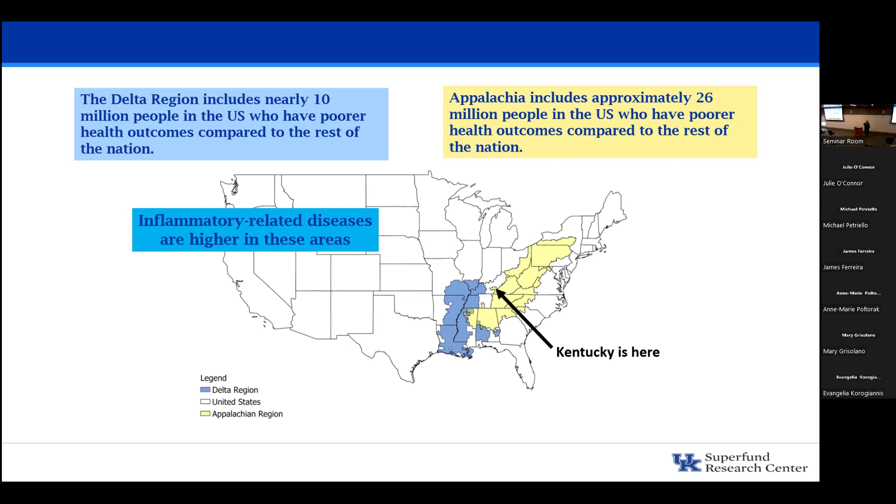Like many Superfund research centers, we follow the framework we are assigned. We have biomedical research projects and environmental science and engineering projects. Our biomedical projects focus on disease risk prevention, and we focus on healthy lifestyles—how nutritional interventions can reduce the toxicity or toxic effects of pollutants. That's project 1. For project 2, we look at how physical activity can reduce harmful effects associated with toxicant exposures during pregnancy.

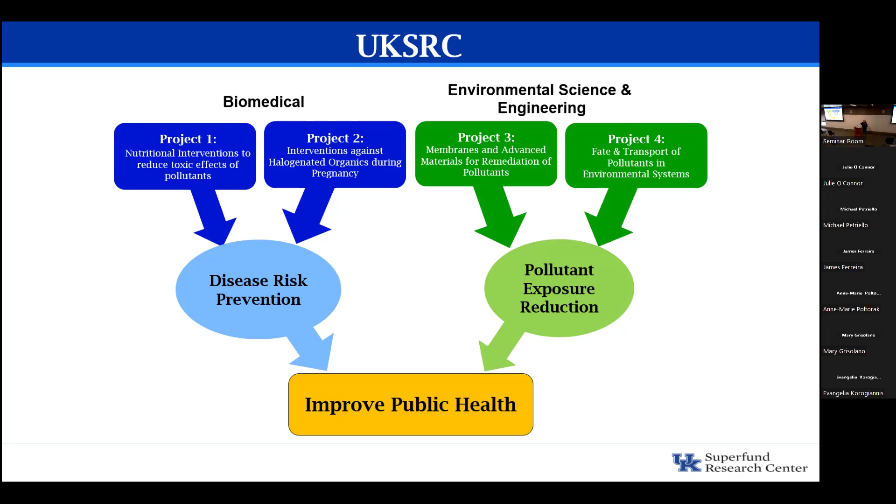We work with our communities in Kentucky, and that cultural context—interacting with communities, having long-term lasting relationships—is critically important for every Superfund research program, and ours is no different. Our program has been funded since 1997, so we have long-lasting relationships with our communities and know their needs. We're constantly assessing them and strive to empower them to make the best decisions with the science we know, answering their questions. We want them to make decisions about protecting themselves from pollutants in air and water, and improving their health, including diet and physical activity. That's really the goal of our center.

I want to tell you about two recent outcomes that are really impactful and capture what we care about a lot in our center. As director, these are outcomes that really describe what matters to me. The first one was discussed in Environmental Factor, an NIEHS newsletter, in April of 2023.

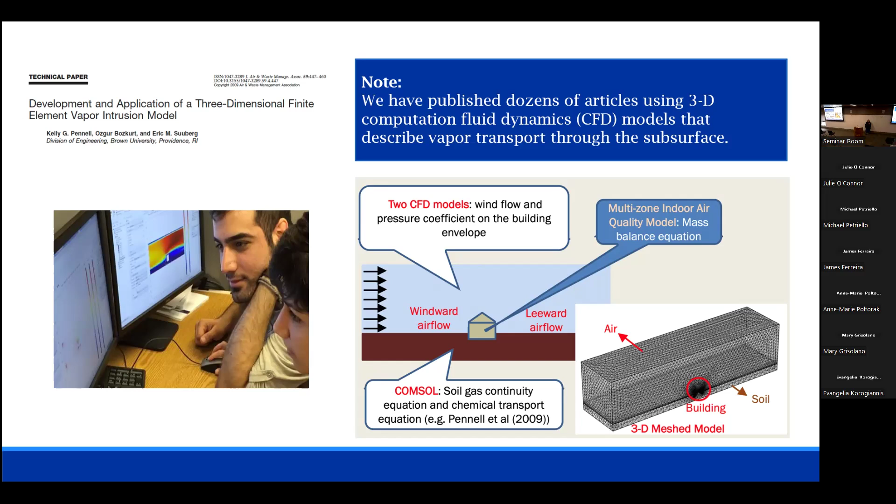As an inspiring person that I am, I convinced other Superfund research programs to go with me. Thank goodness. So we went into a community, the Metro Boston area, and we had three Superfund research centers going. We had people from College of Public Health at Boston, and I had a longtime colleague and mentor of mine, Eric Suuberg at Brown University.

We went in and we were going to start drilling holes through, and we did basements, backyards, collecting indoor air.

We did all of that. We took geoprobes into people's driveways. You can see that these houses are very close to each other. A driveway is all that separates them.

We recruited homeowners to allow access for sampling, so they had to opt in. This was Madeline Scammell from Boston University School of Public Health who was part of the recruitment of these property owners, homeowners. We partnered with state regulatory agencies. We interacted with responsible parties.

When we were doing this, it was based on a classic, and now I know outdated, vapor intrusion conceptual model. It was included in the EPA draft guidance of 2002. We were out there in 2009, 2010, 2011. It was a multi-year study.

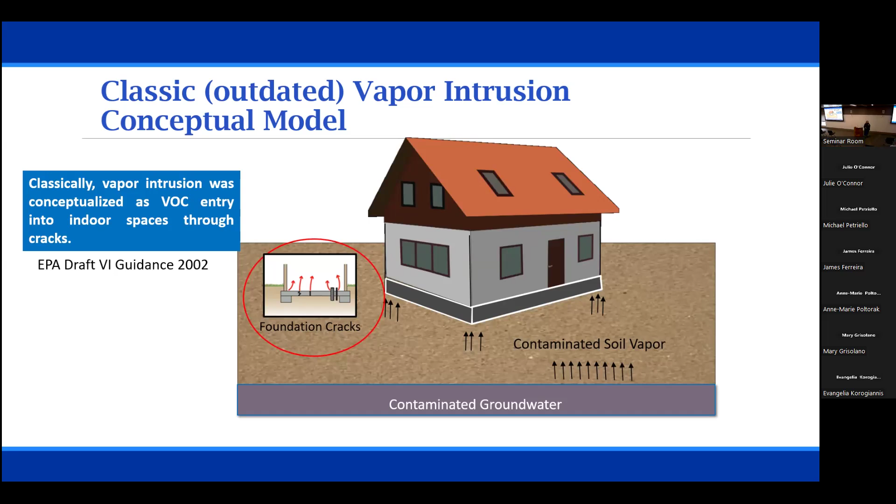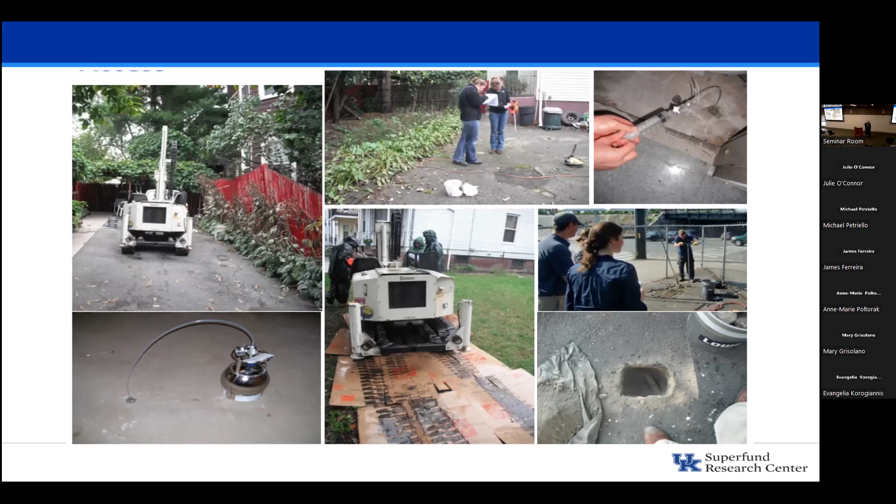And we made a discovery. We learned that during our indoor sampling, we were getting higher concentrations on a second floor indoor air than we were in the basement. This made no sense.

At first, I was like, let's just collect another sample. This makes no sense, and it absolutely is messing up my validation of my computational fluid dynamics model. And my lovely colleagues who are in public health said, Kelly, but this is a public health risk. And I said, it may be, let's collect another sample.

And we continued to talk about it. The reason being is that that basement had already been mitigated.

So in vapor intrusion, the way you mitigate is that you depressurize the basement, you usually have a vacuum extraction well, and the entire basement had been sealed. So they had epoxy on all the walls. So my engineering mind said, this is not a vapor intrusion problem.

Let's sample again. And again, my great public health colleagues, who are now near and dear friends of mine, said, Kelly, but it is a public health risk. I said, but my model. I said, Kelly. So we did this. And it really wasn't that much of a back and forth, but all of us were kind of like, this is very odd data.

And why is there this sewer gas smell? And why do we have slightly higher concentrations where there is sewer gas smell? In hindsight, this makes a lot of sense, but when you're in someone's home and you're trying to make sense of data, and it's taking two weeks to get your data, it's very hard to put it all together.

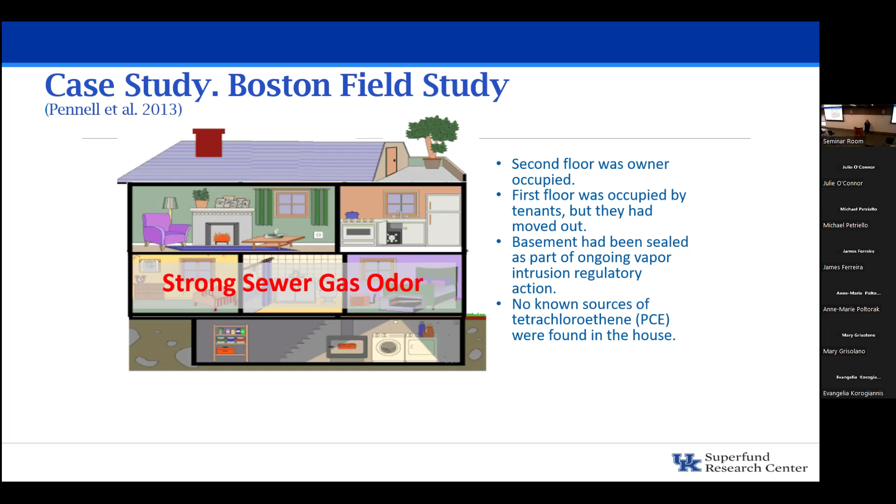It turned out, after a lot of back and forth and a lot of thinking—and I don't like the term overthinking, because I think I usually think just the perfect amount—we discovered this was coming from a faulty toilet connection. All toilets have a wax seal on them. If you've ever sat on a toilet that's slightly jiggled, it might be the wax seal. If you've ever smelled sewer gas, it means sewer gas is getting into your building.

What we discovered is that this sewer gas actually was a main source of PCE in the building, and that the mitigation system that was installed and approved by the regulatory agency was actually not mitigating the vapor intrusion risk. The vapors were coming through a faulty toilet connection. When we repaired the toilet connection and sealed it, there was no more PCE in the building.

This had been completely overlooked because the standard procedure for sampling is only to sample on the lowest floor. The same rationale that my engineering mind was using: why would it be higher up above? We should sample on the lowest floor. Vapors come in from the basement. It was that conceptual model.

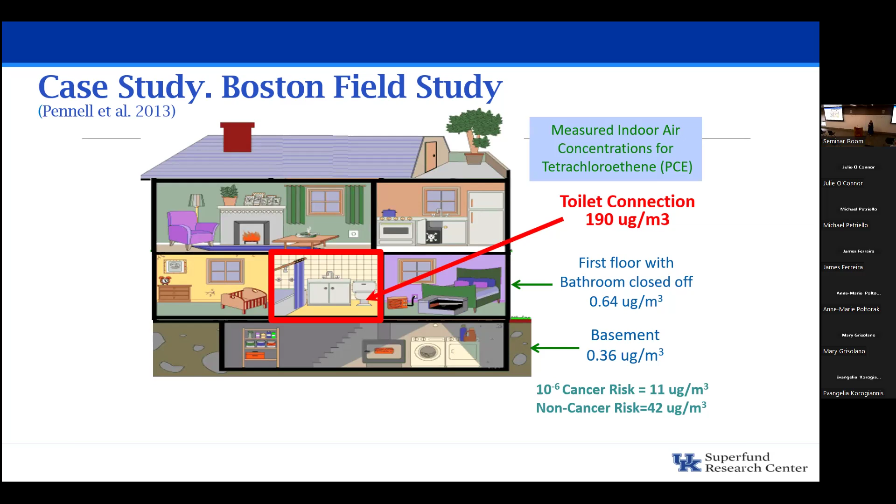Our findings were published. It created a lot of people doubting us, and then people coming forward, and then back and forth. It was a bit of a real disruption. Then it made it into the finalized EPA vapor intrusion guidance.

So you can see, as I underlined here, they actually say vapors can also enter structures not intended for human occupancy through sewers, drains, whatever. And so suddenly this went into the guidance in multiple places. If you now search the 2015 finalized vapor intrusion guidance, it mentions sewers in multiple places and lists our finding from that study that was originally only supposed to be validating my model. Our significant accidental finding was that sewers are a significant entryway for vapor intrusion.

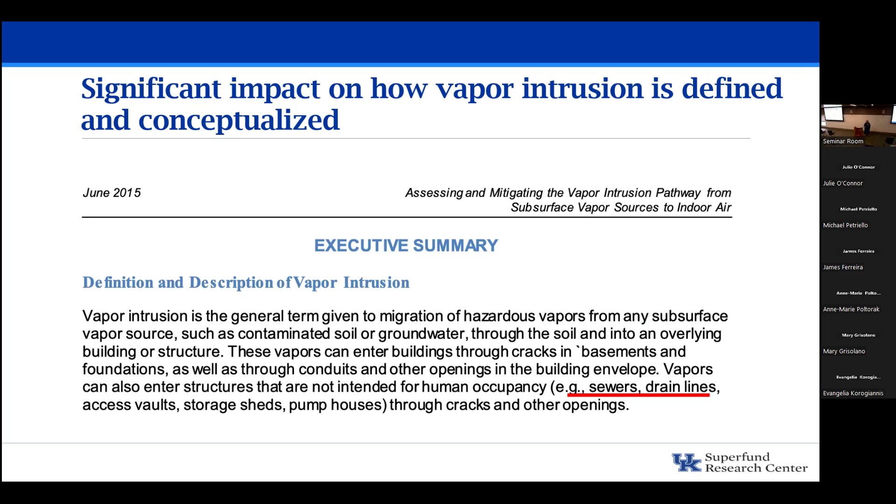And so thank goodness we questioned ourselves. The issue, why I said it caused a disruption, is that suddenly, who's responsible for that? Is it the city? Is it a municipality? Is it the responsible party? Is it a homeowner? Because remember, it was a faulty toilet seal.

Who's responsible for that? Should the city—were they allowing discharges? Oh, but their sewers were really dilapidated. Should they have been maintaining that? Suddenly, it's just a blame game. And that was very difficult.

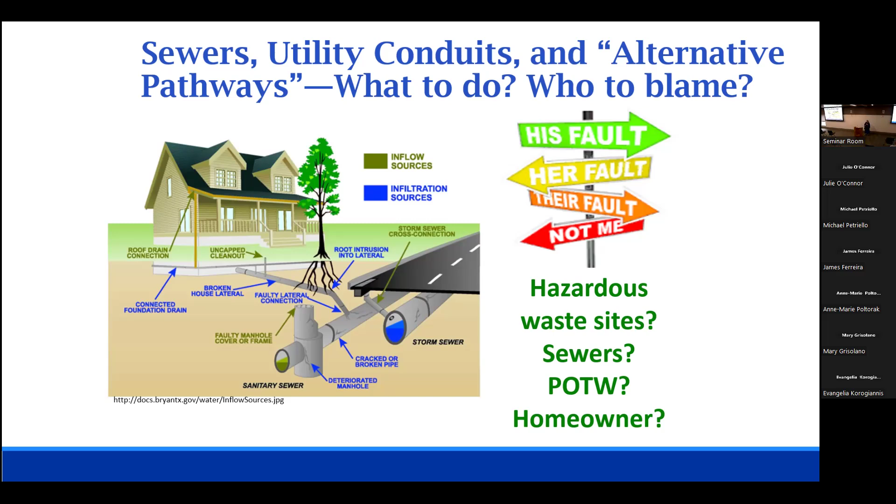Sewers, if you don't know, are a major infrastructure challenge. They leak. They leak a lot. And so if you are not expecting them to allow contaminated water to get into them, you have a faulty conceptual model. There are over 1 million miles of sewers in our country, and we largely do not think about them. Many of our sewers are broken or leaking.

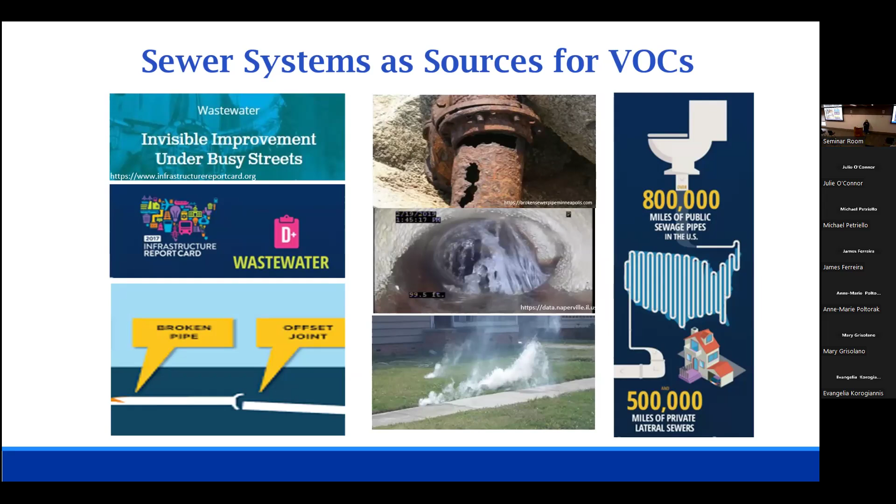This is just a hypothetical. I'm not saying this is true at this site, but what I want you to consider: here is a 5-mile TCE plume. It happens to be in Michigan. When we think about TCE plumes, we are very quick to think about groundwater contamination and putting people on alternative drinking water. Over that 5 miles, we need to think about what is atop that 5 miles.

So a 5-mile groundwater plume is below ground. But on top of that are entire cities.

Infrastructure, so much else—entire communities. Have we thought about all of that? We think about the public wells; those are quick for us to reduce risks to. But what are the other potential exposure risks we should be considering, and have we considered them? Alternative pathways that promote vapor entry into indoor spaces have not been adequately conceptualized or mitigated, typically.

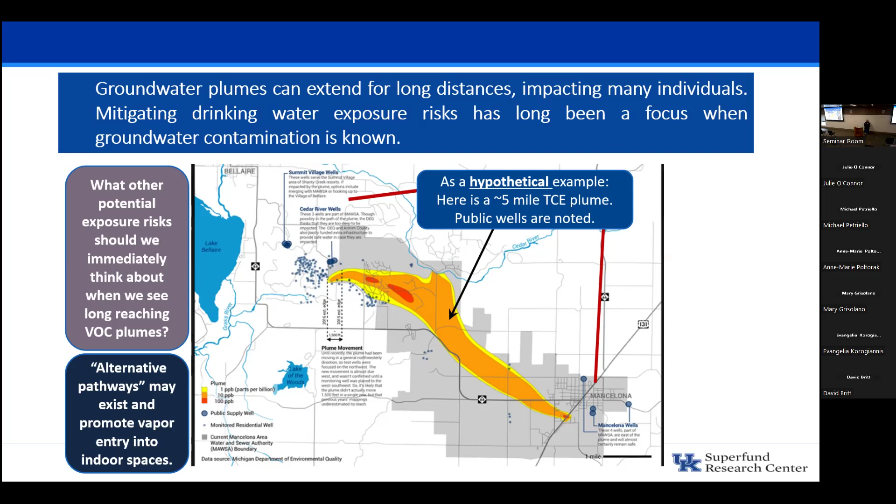Here's a study we did in Mountain View, California, where we continue to work quite regularly. What I'm showing in pink is the vapor intrusion study area as originally defined, associated with a TCE plume from a Superfund site. The blue area is an expanded vapor intrusion site due to sewer system vapor intrusion.

If you look at the scale, you can see it's a quite large area that was expanded. All of that includes buildings, homes, dwellings. When you only consider the classic conceptual model, you completely miss that.

If you look at the yellow circles, those were hotspots from where wastes were previously dumped. There was slumping in the sewer line, there were cracks, and there are hotspots in the environment there. We did a lot of work to conceptualize that and published it—the bottom pictures show my group and collaborators doing field studies there.

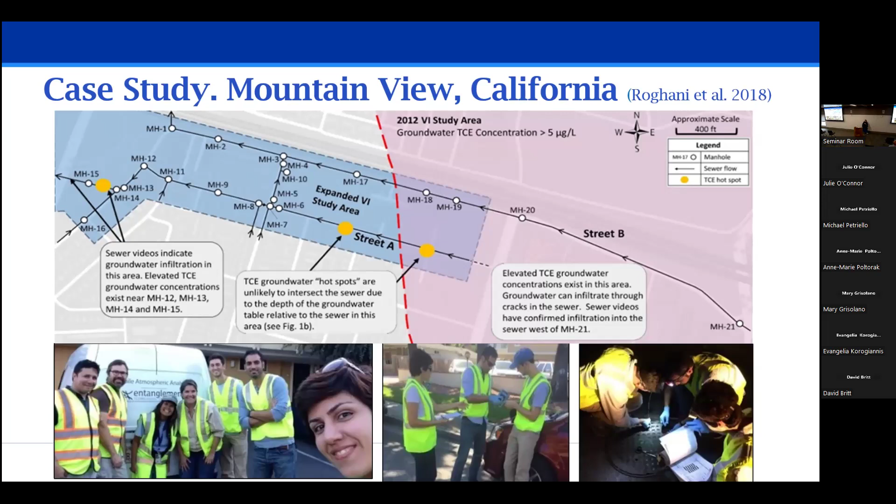While we were there, we collected many samples from about 40 different manholes and cleanouts in the sewer system. We did TO-15 sampling, collecting air and vapor samples in Summa canisters. We also did passive sampling, collected sewer water samples, and looked at videos of the sewer.

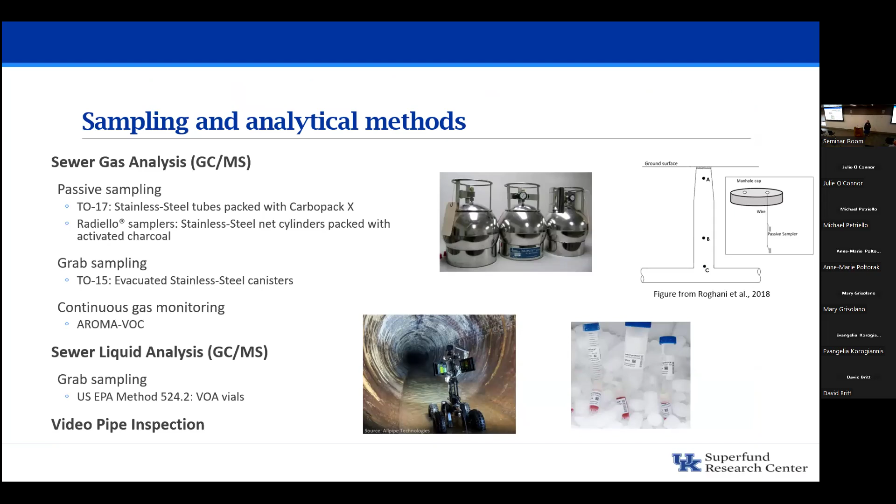What I want you to think about is a manhole versus a cleanout. A manhole is typically in the street or in the right of way. A cleanout is typically near a home or right up against a home. What connects those two—the sewer main and that cleanout—is called a lateral, typically.

If we're detecting TCE vapors in a cleanout, that really means they're very close to getting into a home. So the question is, how do we keep those TCE vapors from entering a home? You might think we have plumbing traps—we've all seen things underneath our sink—so they don't get into my home. But there's very little stopping those vapors and sewer gas from getting into your home.

I want to also discuss why we have so much variability in sewer gas concentrations. I'll show you in a minute that we do have a lot of variability. I'm not showing a lot of data today, but if you want to see it, I can send you publications.

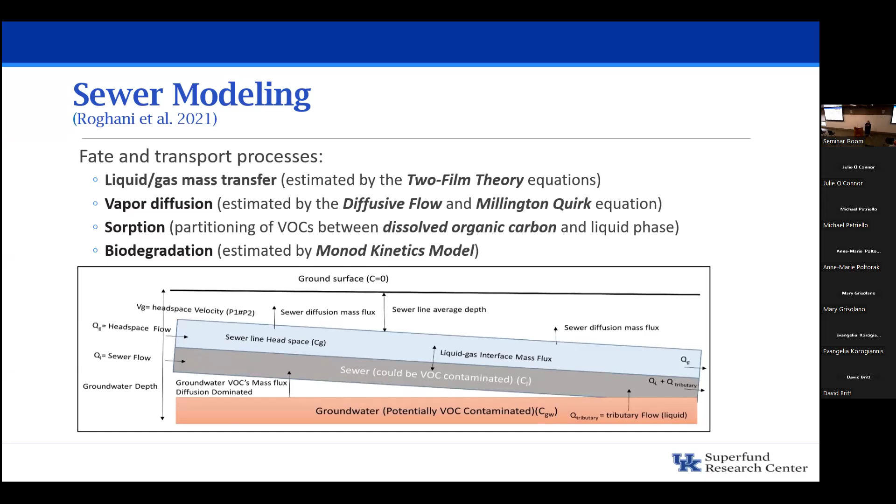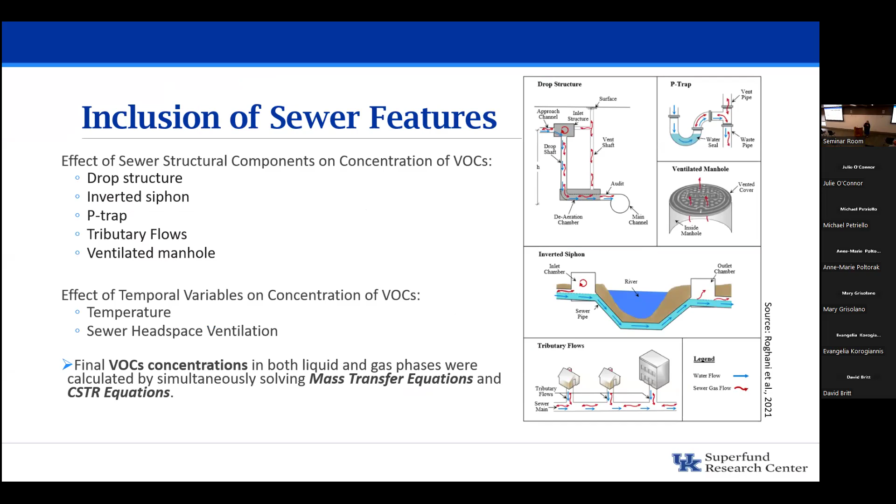We also included different sewer features to account for—so if you have a lateral coming in and someone is discharging clean water, that actually changes your sewer concentration. We've tried to account for many different features here, and again we're seeing some agreement. We published this in 2021.

Still, this recurring thought is: if you know that the source of the contaminant is in the sewer main, what can you do to prevent it from getting into homes? This has been a really big sticking point for how you mitigate this problem. The typical vapor intrusion mitigation is that you put a system beneath someone's basement, but this is not a basement problem. So how are we going to mitigate this?

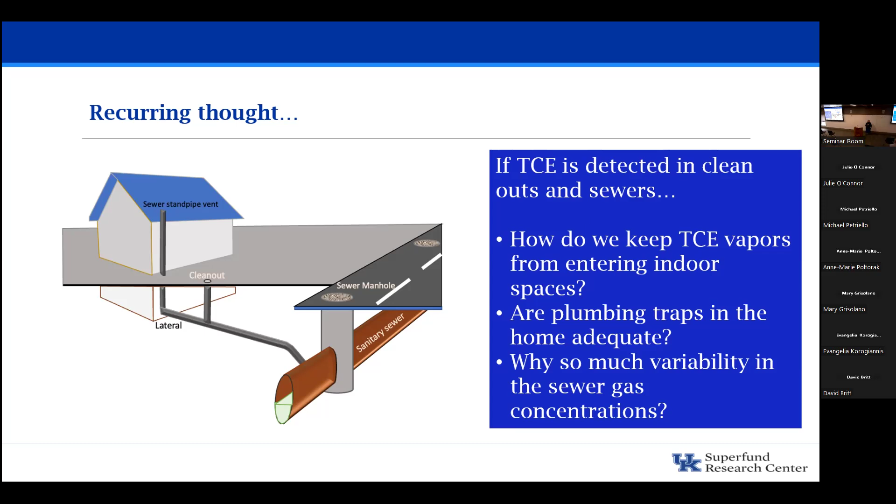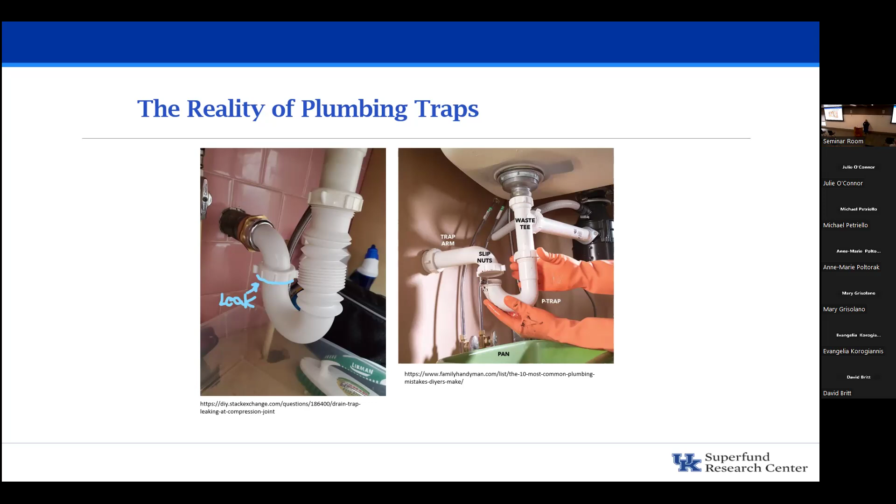A big pushback has been that everyone has plumbing traps. Has anyone ever seen one of these underneath your kitchen sink? Has anyone ever had a bucket beneath your kitchen sink because one of these is dripping? Yes. The other thing is you notice they're typically hand tight. Many of these are DIY, done hand tight. Imagine you drop something down it, you clean it out, you're hurting your back to get under there, you're not making sure it's super tight, you're just making sure it's not leaking water, and half the time they're not lining up right. So that's when you put a little bucket under there. If it's even dripping water, you're absolutely getting vapors into a home. These are typical - if you Google this, you see thousands of these.

We are now doing tests in our lab, looking at plumbing code joints and seeing how much leakage we get out of them. We have tested several of them. Our hypothesis was that if they were installed properly, they likely wouldn't leak. Our hypothesis was wrong. When plumbing fixtures are installed to code, they do not leak water, but many of them do leak vapors.

One that is problematic, which many regulators and vapor intrusion professionals have noted, is a plug - the floor plug that many people have in their basement. Even when that is installed properly, it still leaks vapors, and that is where we see a lot of sewer gas intrusion occurring. Now we actually have quantitative data using a pressure logger, and we're continuing to do more tests so we can publish this, so we're no longer told it's the homeowner's fault because they don't have their fixtures installed right. Even when they are installed right, they're still prone to leaking gas, because these aren't installed to not leak gas - they're installed to not leak liquids.

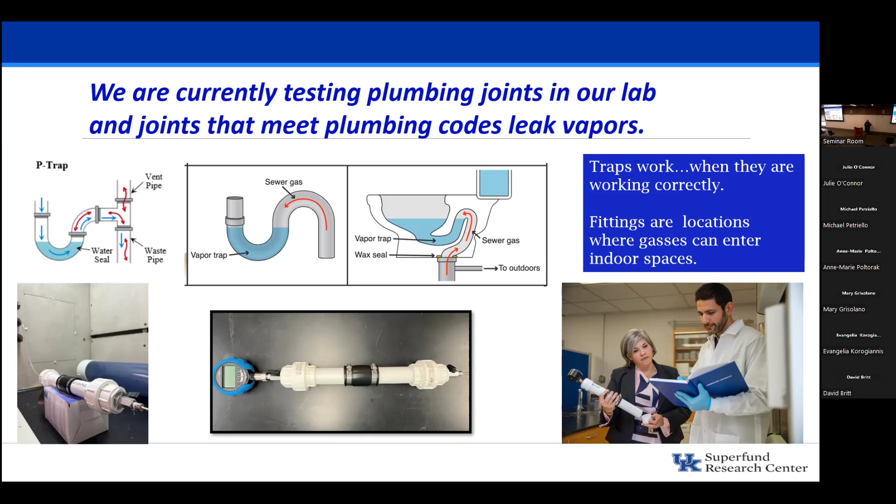A site we're working on is a multifamily development. That same question of how do you stop the vapors from getting into the whole community if you know the sewer main serving that community has TCE in it. We've actually investigated using sewer siphons, which are not typically advantageous - a lot of cities will say don't use them. But the alternatives are things like installing an entire vent on a sewer main and venting out all that sewer gas, which you have to treat with carbon and do operation and maintenance on. You can install special traps in every single home, but those have to be maintained, and you have to get access agreements.

We've installed in this community - I will say the regulator has installed in this community - multiple traps now, these siphons, and they're seeing good progress with them. They're seeing a reduction in TCE so that by the time they're at the other side of the lateral, the TCE has decreased. So we removed the source from getting into the community, and we are working on a publication with that.

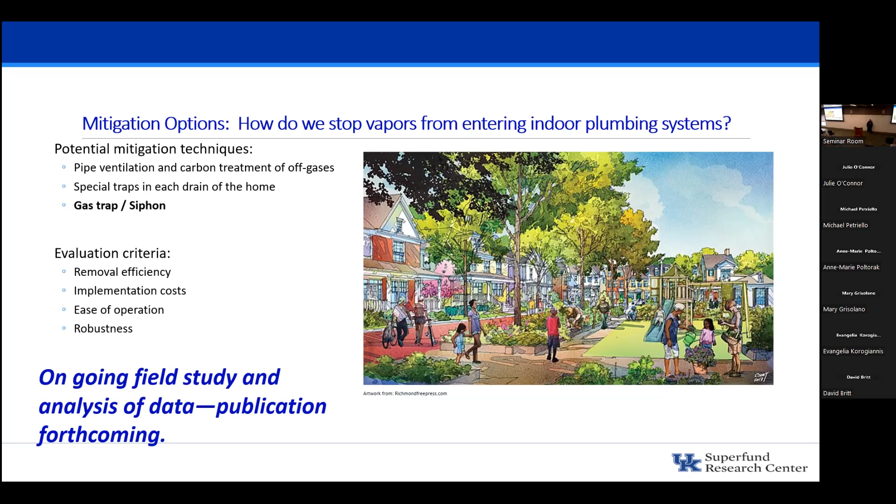Conceptual models show these effects, that there's wind, there's streamlines, there's a vadose zone, all these complicated factors. The reality is that very few vapor intrusion models, even the ones recommended by EPA for screening, ever really included above ground processes. They included only the subsurface. So our group said we are committed to interweaving both the subsurface and the above ground spaces.

So how does wind and weather and the actual indoor air, can we actually model all of that on the indoor air to get a better estimate of vapor intrusion risks? We did things like looking at how building depressurization is impacted by wind speed, direction, temperature differentials, and seasonal effects. Because in the literature, people have all kinds of claims about seasonal effects with very little theoretical backing. So we wanted to look at it from a mechanistic standpoint.

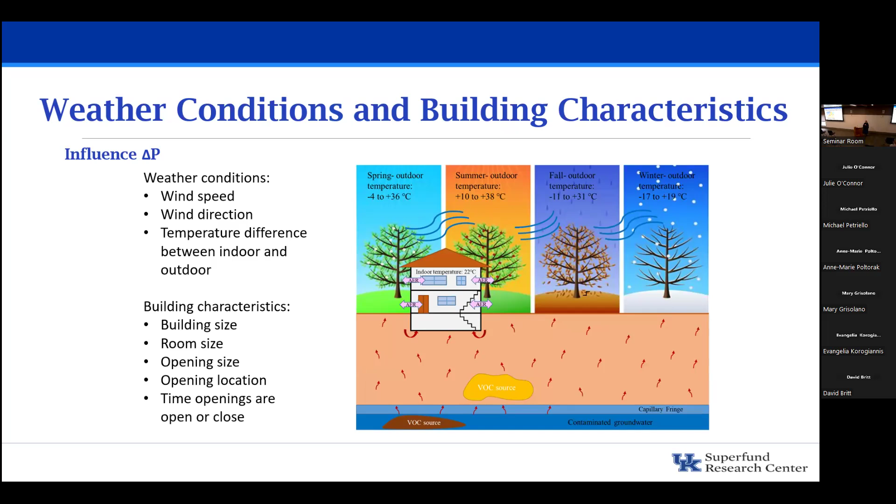We used a house that the Department of Defense had funded a multi-year study at, lovingly referred to as Sun Devil Manor. Paul Johnson, who's now the president of Colorado School of Mines, at the time was the dean at Arizona State University, purchased this house with the intent to outfit it as a vapor intrusion lab. It was completely outfitted, and it was on the edge of a plume associated with Hill Air Force Base. Our group went there, and many researchers could use this house to conduct experiments.

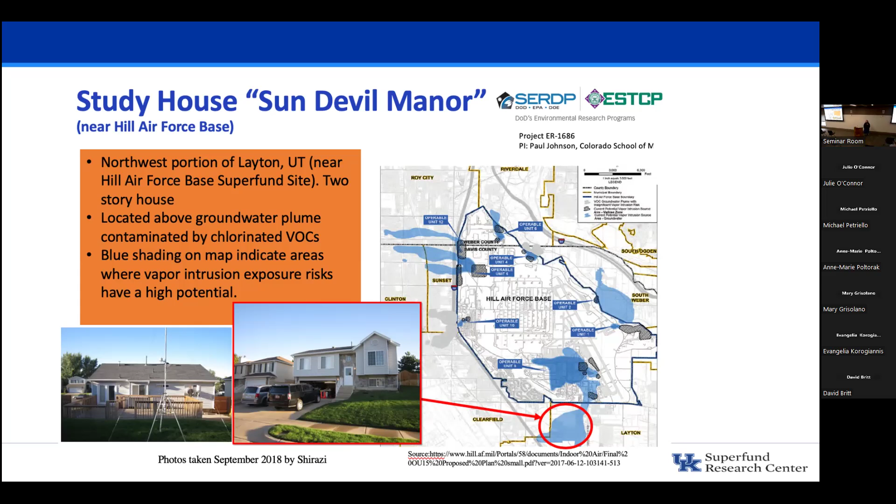We went there and took all kinds of measurements, used some weather data from it, and used the mass flux measurements they had been collecting over many years. This is a picture of the basement, so you see that when I say they outfitted it as a lab, they did. They had many GCs in there, collecting data 24 hours a day, 7 days a week. They had years and years of data on this site. They also looked at air exchange rates and collected TCE indoor air concentrations.

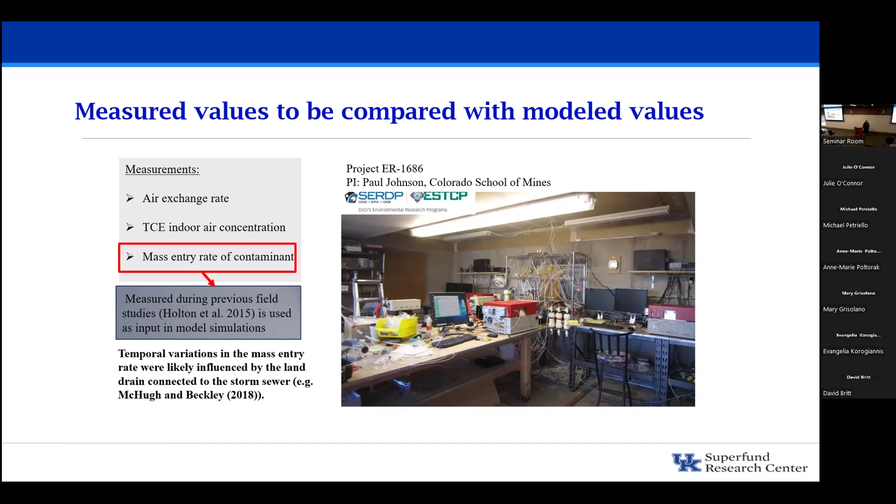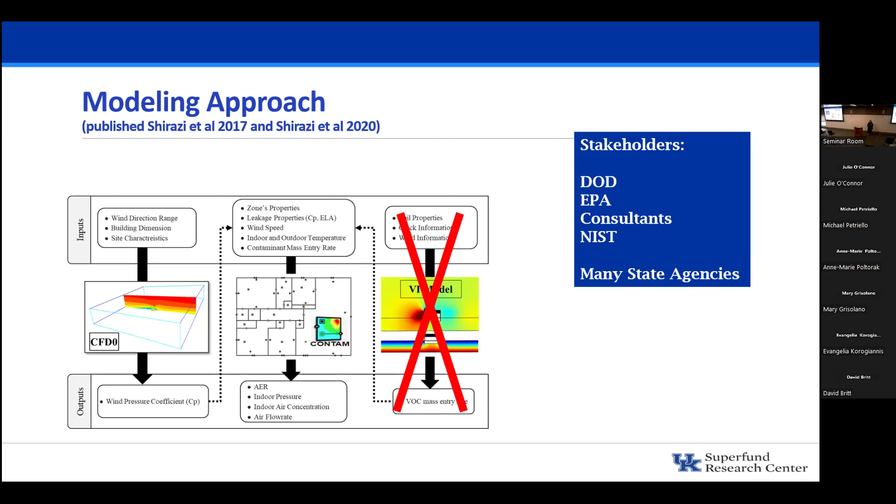What we did was look at a modeling approach where we could couple how weather was impacting this, what they were getting from mass flux into the home from the subsurface, and then also model indoor air. No one had done that before. In the past, all people did was look at a vapor intrusion model, which only looked at the subsurface.

We decided not to use a vapor intrusion model and instead use the field measurements they had been collecting for many years. They had actual data of what the mass flux of TCE was into this house. We used that and modeled indoor air concentrations, and looked at wind effects and pressure around that home.

We used freely available software maintained by NIST. What we learned is that the orientation of the building to wind is very important for the air exchange rate. It's also very important in determining indoor air concentrations. So when you look at a community like this, where an overhead garage door might be situated in a different direction than the neighboring house, you get a different indoor air concentration. It's very important to understand how the air physics impact indoor air concentrations.

One thing written up in the scientific literature about vapor intrusion for a long time is that the data doesn't make sense. This home had different results than that home, and this one over here had different results too. Communities look at it and think things don't make sense. But people haven't asked the really difficult questions: what was the indoor air like? What were the buildings situated like? What was the leakage like from that building?

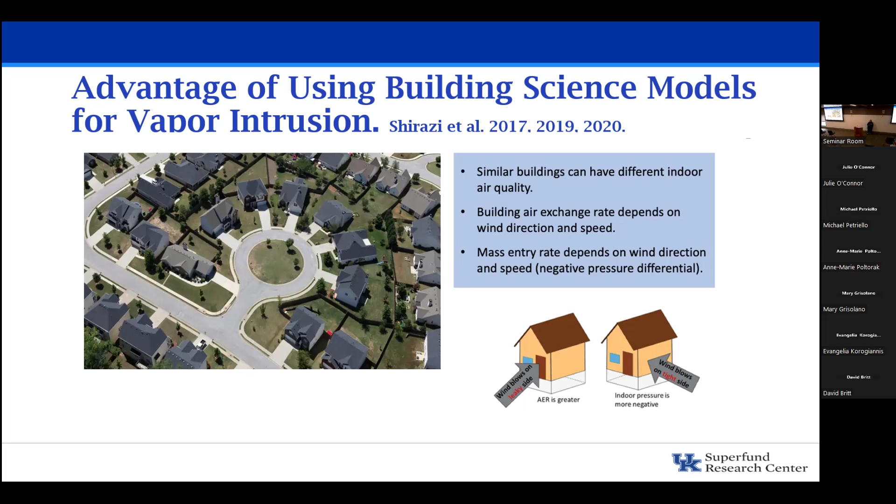We finally developed a model where we could start asking those questions, using science that the building science and indoor air communities had been using for a long time. We were able to bring that into the vapor intrusion community. We published this and showed good verification between what they had been measuring for many years at this study site and our modeling. The other really important thing I want to point out is that this house was a multi-million-dollar study that DoD invested in, with multiple years of data.

This too was a house where they found a land drain that was a source of TCE. They assumed the conceptual model was right, that it was coming only from a groundwater plume, that classic conceptual model. It wasn't until many years into the study that they realized their conceptual model was wrong, and a large portion of this was actually coming from a land drain that connected from a storm sewer to the home. Getting that conceptual model right, questioning your conceptual model, asking is this data just wrong or is it making sense, how can I make better sense of this, this was really a critical learning point and turning point, and it validated what we saw way earlier in Boston. Now I think the community really sees these conduits are important, but we don't always know they're at sites, so this is really important.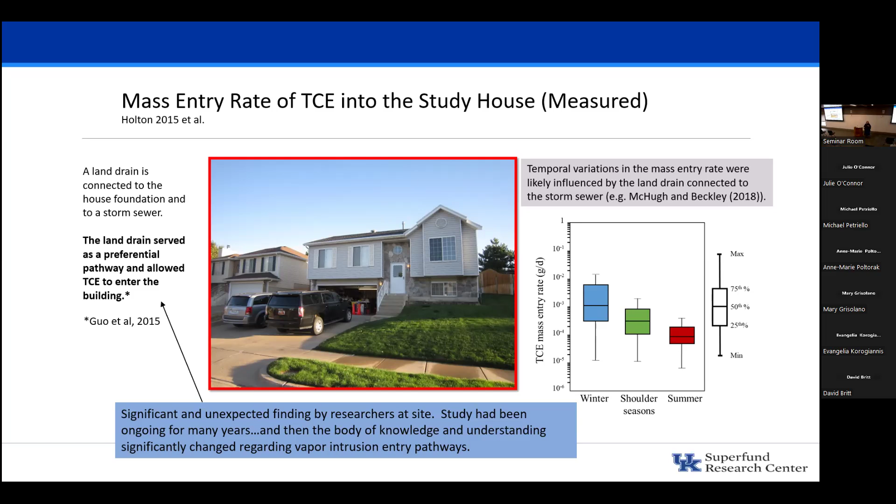So the lessons learned are to always ask, what are you thinking? That's been a major thing in our group for vapor intrusion. You're starting down one path, assuming this classic conceptual model is right, and when you get data that doesn't make sense, you're not throwing it out, but you keep trying to make sense of it with this understanding. The best discoveries we've made, and the most impact we've had, is when we stop and peel back the layers and just say, what are we thinking?

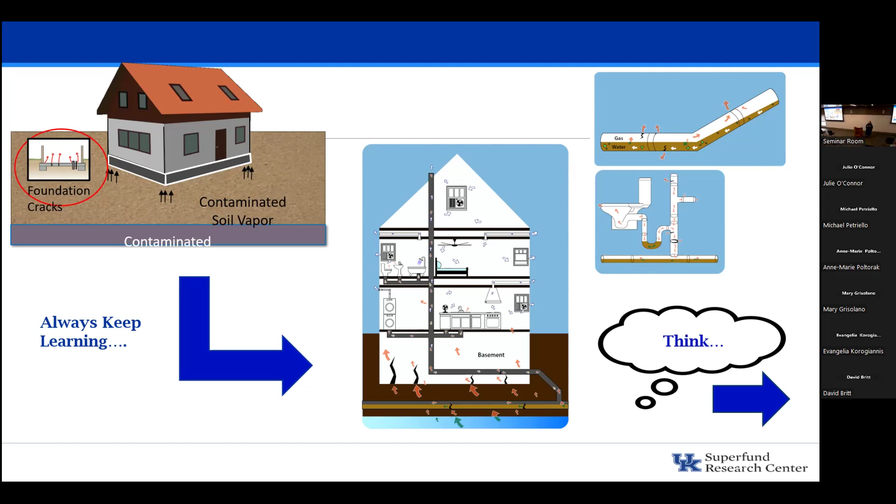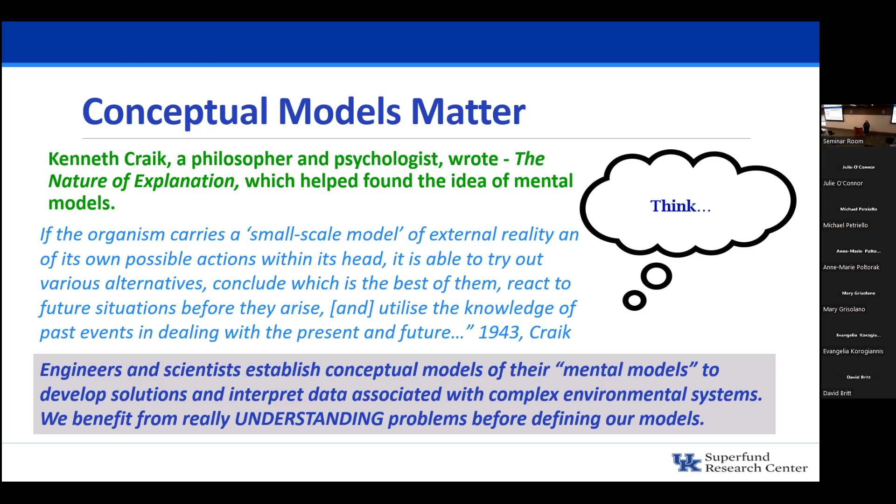I'm happy to take questions.

So the aspect of coming from pipes or the ground, is that basically intruding from the outside, or is that people creating the waste and putting it in, or both? Well, we know for certain sites, and there are multiple sources where VOCs come from in sewers. VOCs in sewers come from what are called industrial pre-treatment permits. It depends if your pre-treatment permit, meaning an industry has a permit, depends what they're allowed to discharge. At the site I referenced in Boston, we just looked up their typical discharge limits, and they were given for total VOCs, and their total VOC limits were like 500 ppm, which is way more. If you look at the partitioning, say hypothetically if that was all TCE, oh my gosh, that's huge. So it goes into that these aren't all integrated as far as what would be health protective.